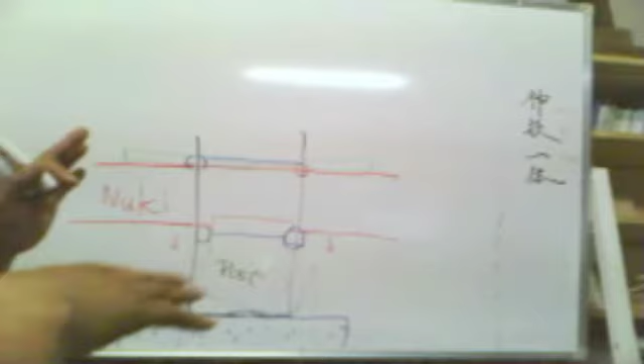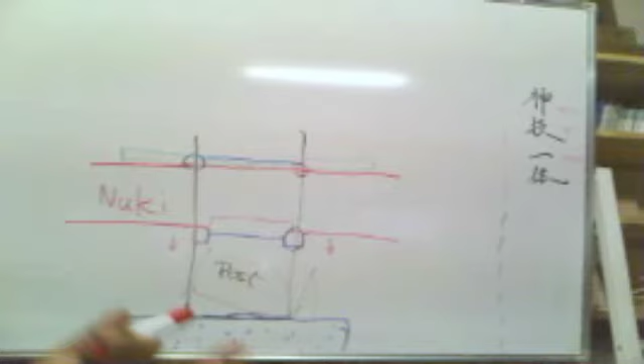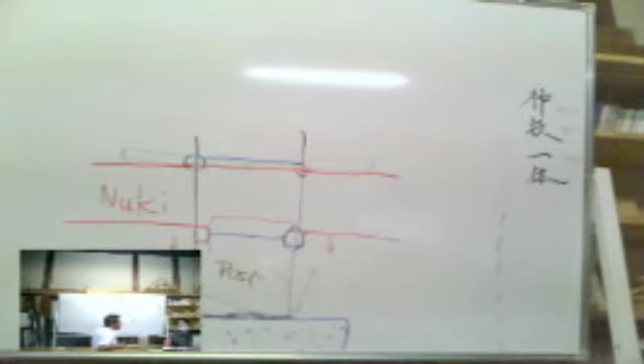Okay. So there's a contradiction. In the event of a typhoon, you want the building to be fastened to the ground. And in the event of an earthquake, you don't want the building fastened to the ground. So in order to deal with both of these scenarios, Ishibadate was for hundreds, thousands of years used in Japan.

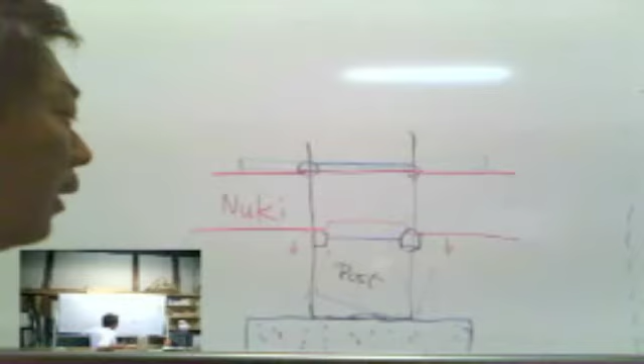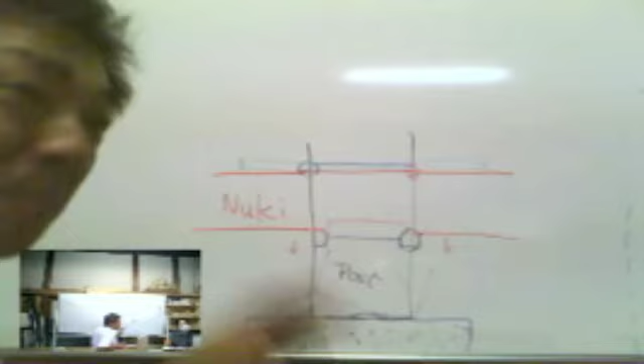So the Ishibadate traditional building practice in Japan can't be guaranteed 100% against all typhoons, hurricanes, and earthquakes, but it was a very effective and still is a very effective building practice in Japan for dealing with these different conditions.

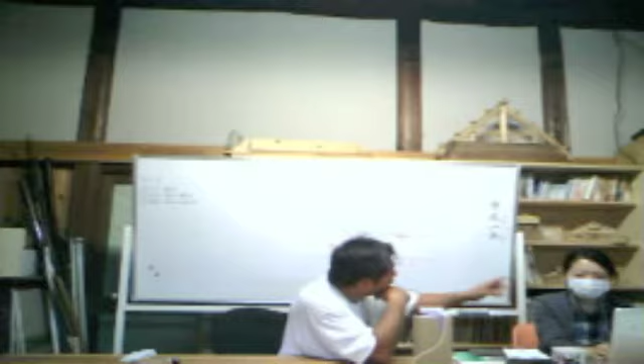So that kind of concludes a quick explanation of what Ishibadate is and the basic principle of a Japanese rectilinear frame as opposed to a knee-braced European frame and the differences defined therein.

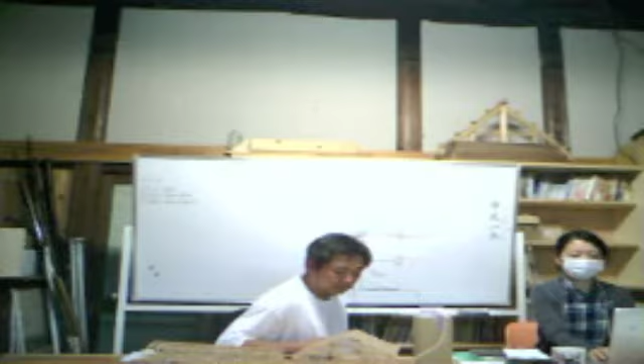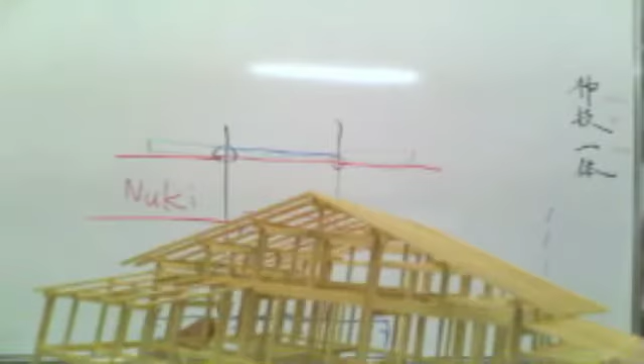This time, what I'd like to show all of you. This is a model of the building that we're actually building at this time. In the model I'm holding, there's no nuki. More detailed and smaller work than what's already done is not possible, as far as making the model goes.

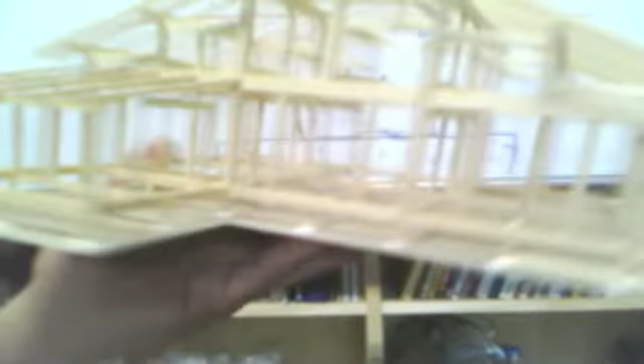Okay. So the floor plan of this house is not a fixed thing. It can change according to the desire of the client. Now to repeat again, the characteristic of Ishibadate is that the building is not fastened to the foundation. And using different timbers, we can change the height of the building.

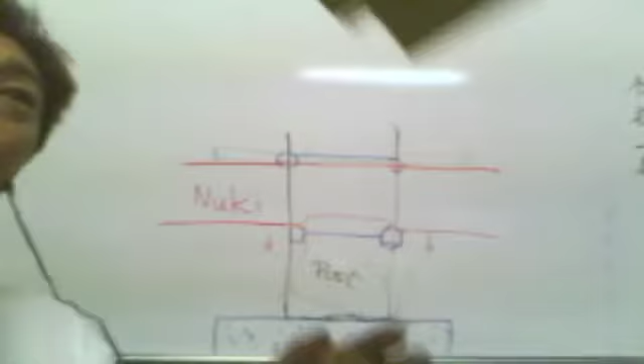Right. Takahashi-san's saying too that there's a lot of considerations. It's based around customer desires and expectations, as well as the species of timber. And based on the species of timber, there will be modifications to the beam structure and whatnot. But he did want to tell you too that there will be nuki in that house. They're just not put into the model because it was too detailed for him to do. And here's the other project he's working on.

So I'd like to point out again that one of the characteristics is the use of only vertical and horizontal members or timbers. Japanese buildings compared to buildings overseas are rather small.

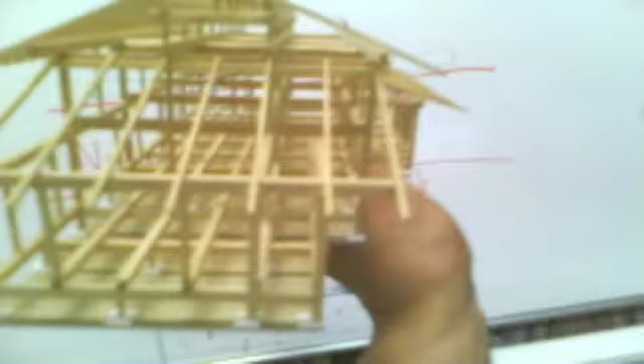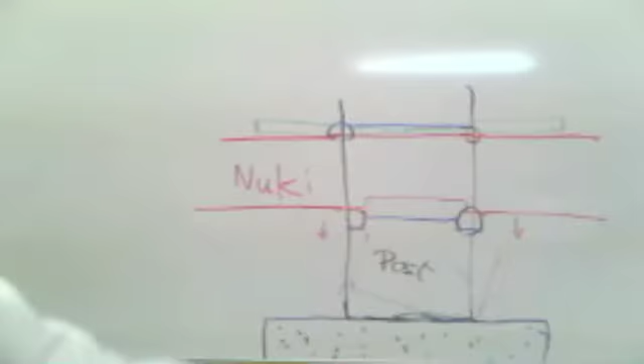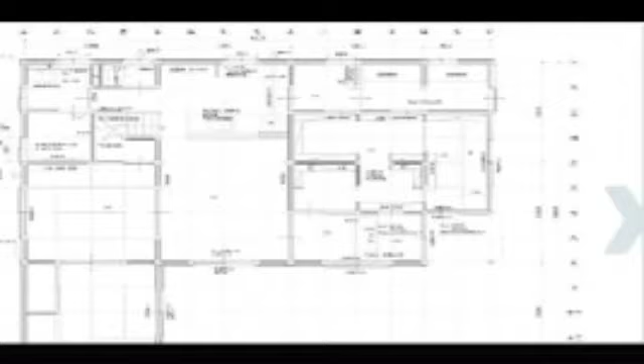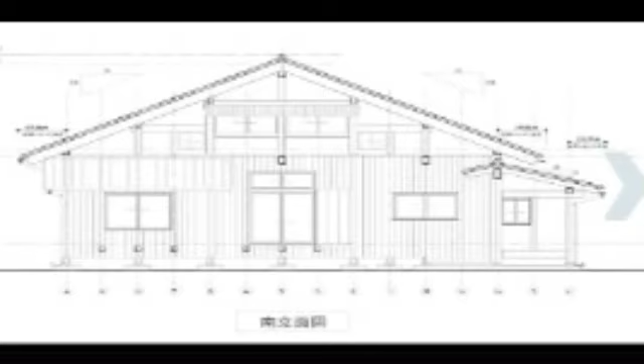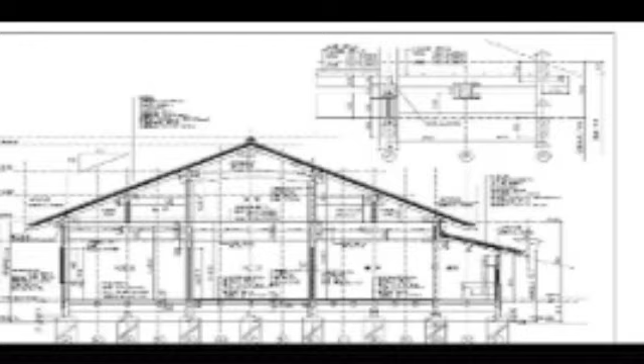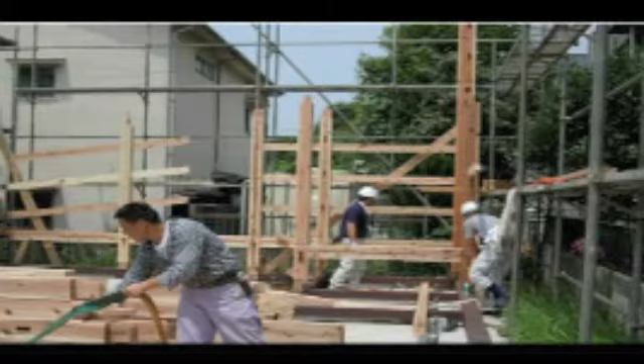And now the building that I'm showing you has been mainly built, and we're now working on the roof. And for our next time together, or the next course, we'll start in the workshop with laying out and cutting the joints.